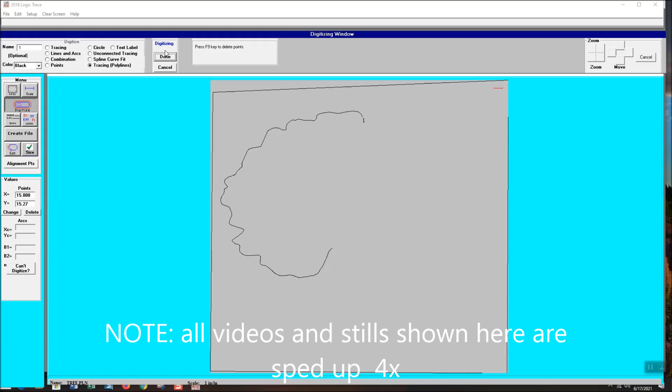I'm going to be using Logic Trace 2018 and I'm going to select tracing polylines. The first part we'll do is we'll trace out the tree canopy. The canopy, or the top of the tree, the black acrylic, is going to be machined out with the CNC.

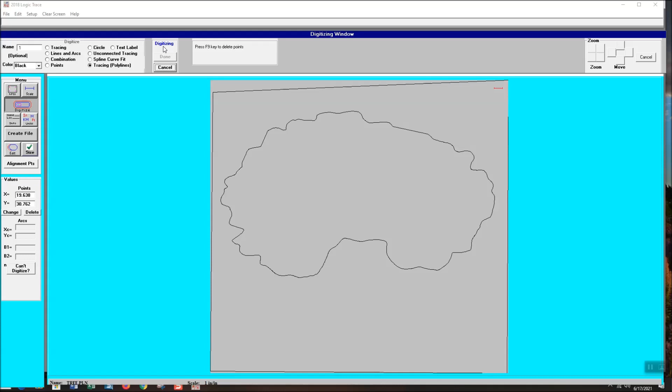To display this tree, it's going to take about a 6 foot by 6 foot section out of a wall. Shown here, I'm going to trace out the tree trunk, and this tree trunk will be made out of 3/4 inch red oak, and that'll also be cut with the CNC machine. So the canopy is traced out, and now the tree trunk is traced out.

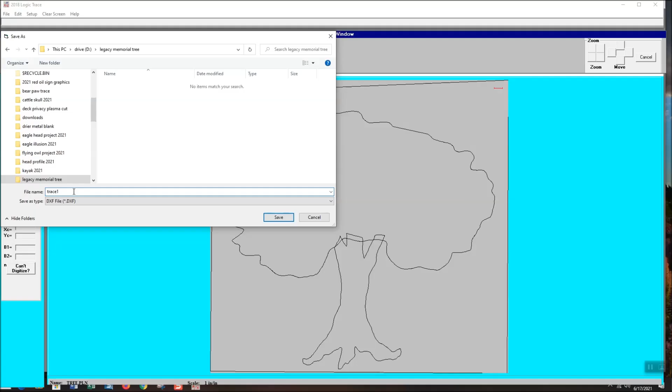We're pretty well finished. I'm going to take these two files and we're going to load them into Vectric Aspire 10.5. Here we'll do the toolpath for the top canopy, and we'll also do the toolpath for all the holes to support the leaves. We'll be using the drill feature on Aspire.

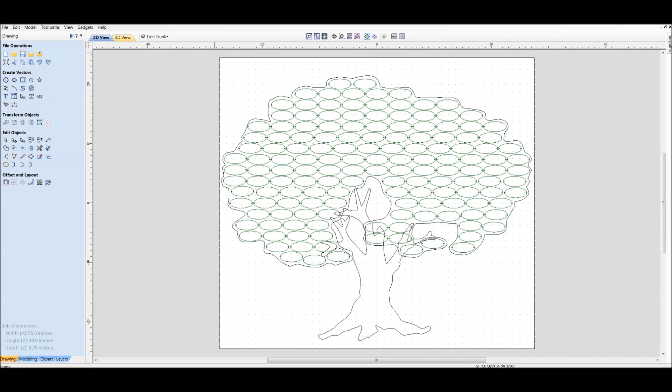Now I'm going to set up the toolpath for the tree trunk. This tree trunk will be made from red oak, 3/4 inch thick. Going to use a 1/4 inch end mill to cut it out. This is a shot of how I envision the tree to look. Here I'm going to set up the toolpath for the Memorial Legacy Tree plaque.

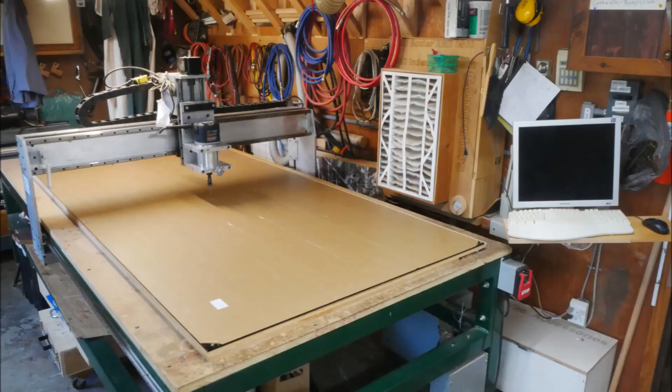Here I've got the 4x8 sheet, the black acrylic, on the table. File is loaded into the CNC. Shown here is the toolpath for the drilling. The drilling went real smooth. It took a while, but it was smooth and accurate.

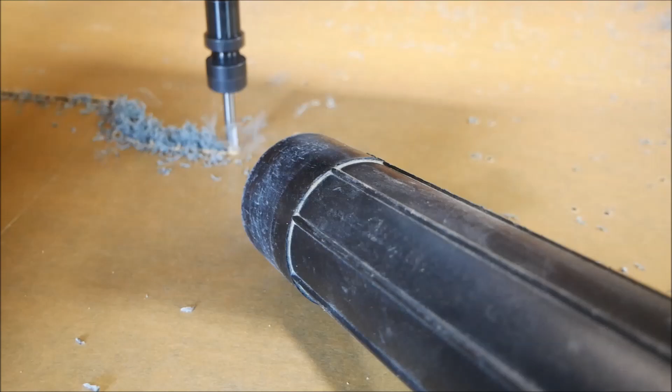Here we're starting to cut the inner canopy, the 1/4 inch black acrylic, using a 1/4 inch end mill, running at 19,000 RPM at about a 50-inch feed rate. Also had to keep an eye on that plastic type sawdust. It was sticking to everything. Shown here, both canopies are cut.

Now we're going to set up the toolpath to cut out the trunk. The trunk is red oak and it's about 3/4 inch thick. Very smooth cut. Here you can see the trunk is finished.

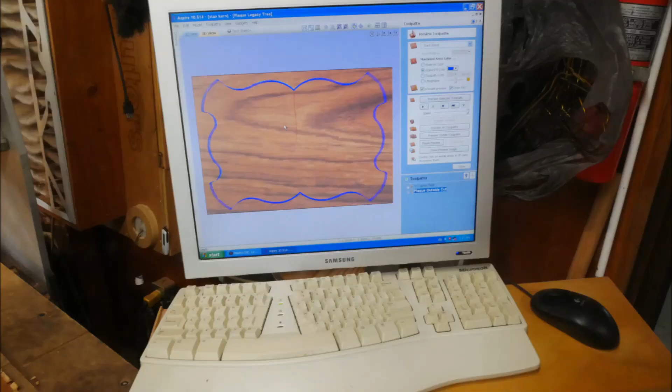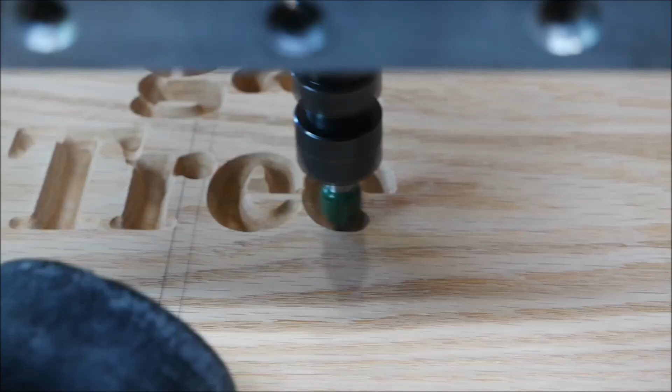Now we're going to set up to cut out the Memorial Legacy Tree plaque. I'm using a V60 bit running at the same RPM, 19,000 RPM. It's a deep engrave because I want that look. The letters are going to be painted black, the plaque will be sanded, and then a clear finish applied.

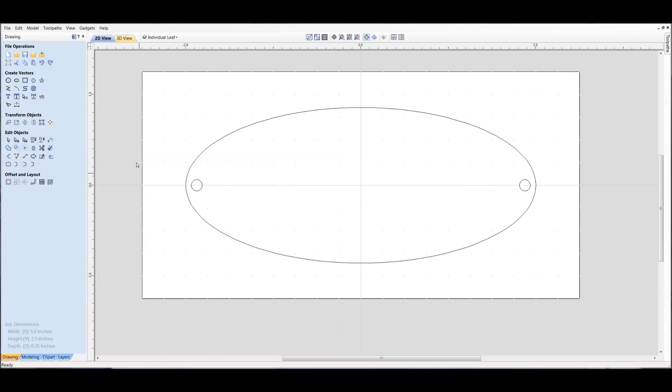This is just a mock-up of the canopies, the trunk, and the plaque, and 2 leaves applied. Again, I use Vectric Aspire 10.5 to design the leaf. That file is now loaded into the CO2 laser, and I'm going to cut out the leaves.